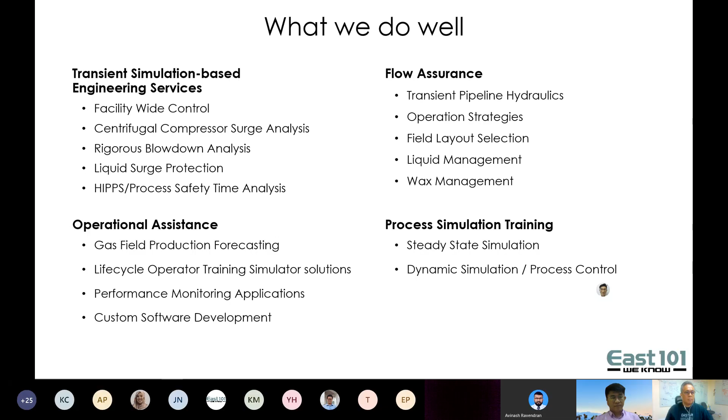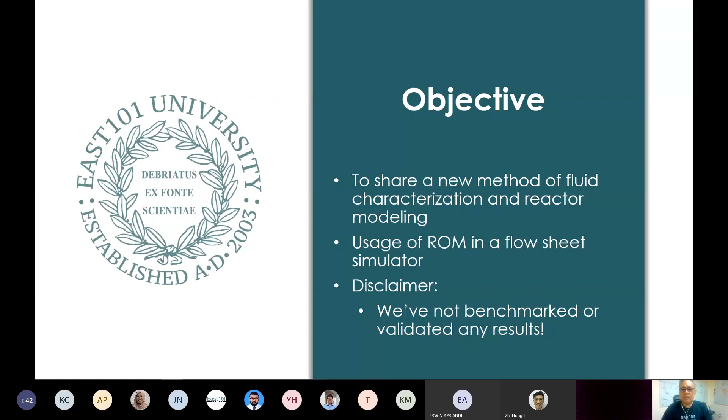Whoops, I've gone back. Okay, so the agenda is as follows. First thing is we'll take a look at fluid property requirements in process and chemical engineering, particularly in oil and gas, and in this particular example, particularly for downstream implementations.

We're going to be looking at some of the traditional methods that have been used for this, and we'll also later go into this, what I refer to as a new method of fluid characterization using a molecular compositional model.

After that, I'll show you how some of the reactors are set up and introduce this concept of a reduced order system. Reduced order system, I guess back in the 90s, if anyone was here doing computing in the 90s...

These were kind of, I guess, referred to as neural net models. And I think HYSYS in the early days, in the 90s, had dabbled with implementing neural net layers to make the reactors move faster. I'm really sorry, I'm getting some noise from my phone, I'm going to turn that off. I didn't realize it was on. Okay.

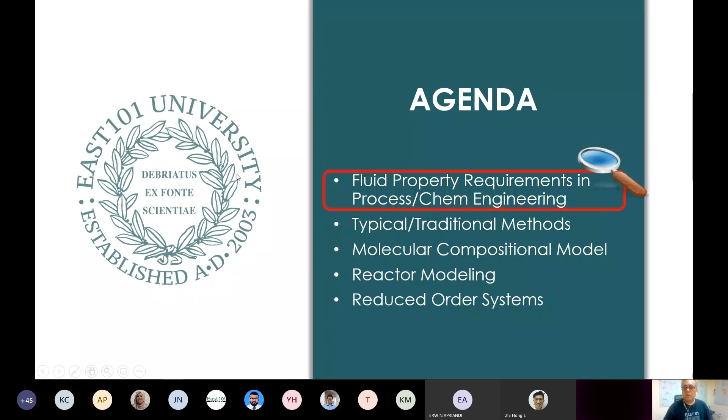So let's take a look at fluid property requirements in process and chemical engineering. Here I'm showing your typical asset life cycle. Some of this I've kind of covered in the 10 commandments of process simulation, which is the first in the set. I'm just going to skim through this really quickly.

If we take a look at the typical asset, and this can be any kind of asset, it could be an offshore facility, a downstream facility, refinery, FPSO, etc. These are some of the typical activities that go on. You start off with a new opportunity, do some feasibility studies, conceptual design. You later move into basic design or FEED, detailed design, construction, commissioning, startup operations.

Once you've been operating for a while, you start taking a look at improvement, extensions, revamps. And in some cases, at some point in time, if you're operating say a topside facility or an FPSO, when you're having a decline, you might be decommissioning your facility. So if you take a look at all of these steps, all of these particular areas, you're going to be doing some form of computation or simulation.

It could either be doing a flowsheet simulator like Symmetry or HYSYS, Unisim, Pro2, Aspen Plus, or it could be a fluid flow application like Olga or PipeNet, PipeSim. There's a range of applications. So I think nowadays you can't get into an engineering office without seeing some kind of modeling or simulation being done.

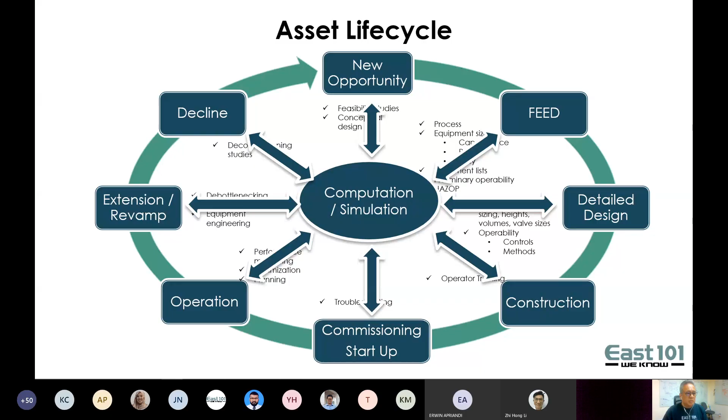Just before I continue, I'm just going to ask my team over here, is everything coming over okay, the video and the voice? Yes, it's perfect. Okay.

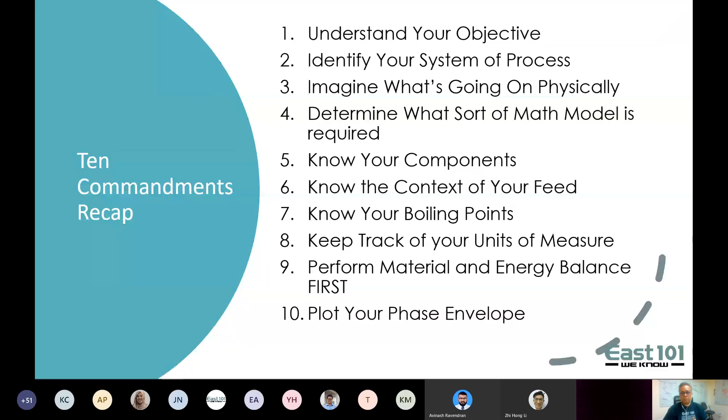The rest are pretty much common sense for most engineers: keep track of units of measure, perform heat and material balances first, and plot your phase envelope. So you notice I've got 3 items here, 5, 6, and 7, which are essentially about the components of the feed. It's really important. Of these 10 items, 30% have to do with understanding your components and your feed, because if you don't have your feed properly characterized, everything else is not going to be correct.

Okay, so let's take a look at your typical hydrocarbon supply chain. I'm starting off from the reservoir. I'm a chemical engineer, and for a chemical engineer, that's what a reservoir looks like to me. So we've got essentially some gas, oil, and water trapped between some impermeable or cap rock.

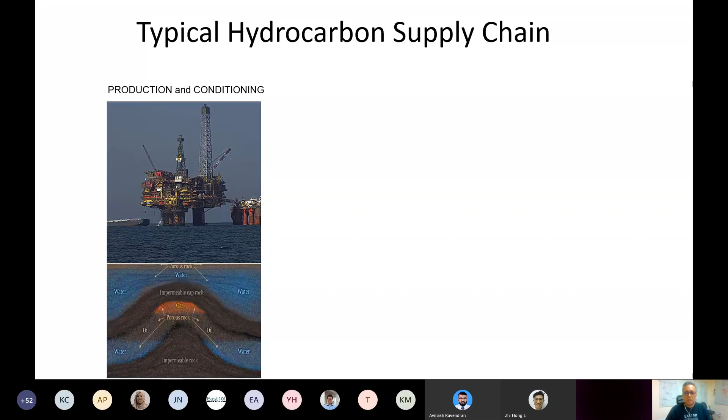You have a drilling and processing platform. Bring up your hydrocarbons and impurities, separate them at the production stage. You have some production conditioning happening in an upstream facility. Then you feed your hydrocarbons to a downstream or midstream facility, a refinery or gas plant, where you do a first step of separation.

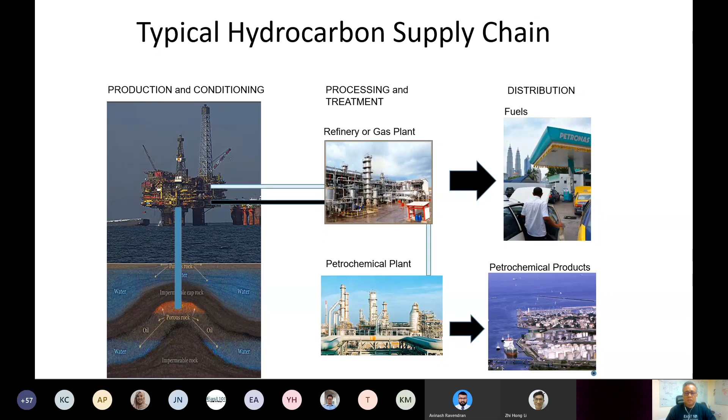From here, you might be distributing fuels. So if you go to Kerteh, you'll see all the hydrocarbons coming from offshore, landing at the onshore gas terminal or the onshore slug catcher, and then being piped to a refinery or gas plant. Then the fuels are sent to distribution or export, middle distillates, or some of the ethylene would be sent to petchem for petrochemical products. So this is a typical supply chain.

And today I'm going to talk about roughly two of these areas: production upstream and some refining.

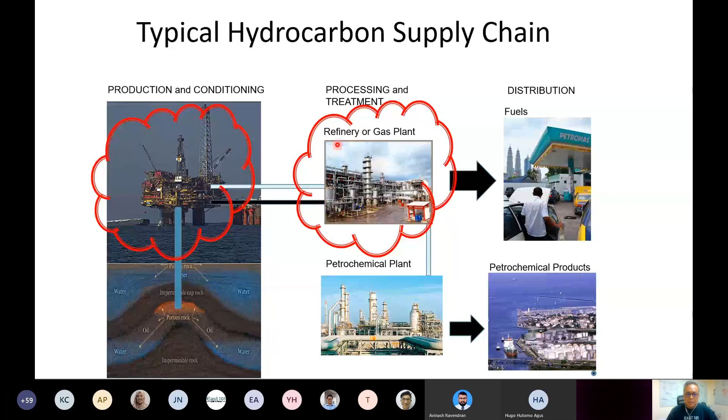So I'll be talking about both of these areas, production and conditioning, and processing and treatment. But primarily we will be focusing on, that's my laser pointer, on refinery today. But I'd like to talk about some of these other areas first.

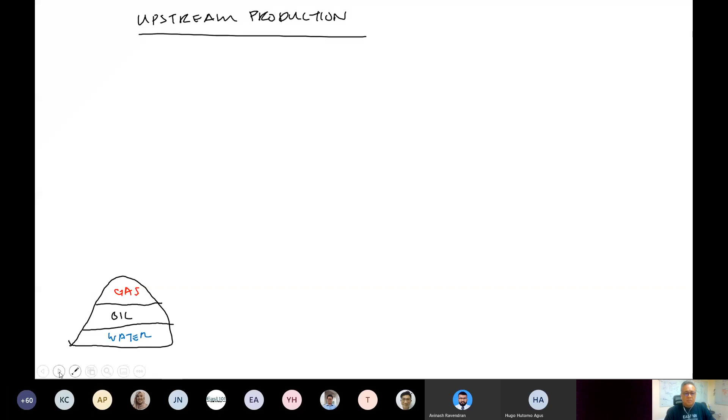Okay, so we're talking about feeds and properties, fluid characterization and various properties. Let's take a look at the typical kinds of properties that we would be interested in. So I've got again a sketch of an upstream facility. I've got my hydrocarbon reserve, a well choke, a pipeline, and I'm bringing this to a topside facility.

And the topside facility, I've got some bulk separation. I'll be sending my gas to compression, gas injection, gas lift export. I'll probably be doing some dehydration with the gas. I might have some TEG dehydration, or in some cases we have CO2 acid gas removal. We might have some membranes, or in some cases some amine systems.

For the oil, we'll generally be dewatering it and potentially stabilizing it in some cases. If it's an FPSO, you'll be stabilizing it and putting it in the storage tanks in the hull. Otherwise, if it's a central processing platform, you might be sending that to an onshore facility. And the water is generally going to get treated as produced water, and it'll be used as water injection or sent overboard, so you'll be removing all the hydrocarbons from there.

So if we take a look at this, what kind of engineering calcs do we do? I think we've got in our audience today people coming in from upstream and downstream. But I guess we've got some common computations that we have across the board.

So if you take a look at an upstream facility, on the pipe we typically are going to have some kind of design computation that we'll be running, diameter, layout. When you do your field selection, you'll be taking a look essentially at the hydraulics in the system. And later you'll be doing some flow assurance, transient fluid flow using an application like Olga, and you'll use this for liquid management, slug control, slugging management, wax management.

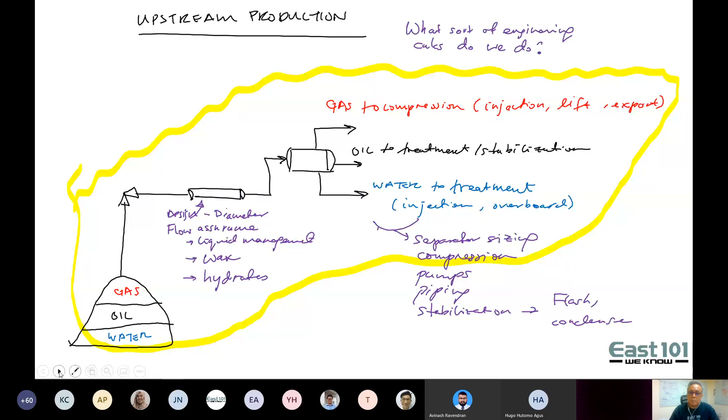So what kind of properties do we need? This is always the first thing you think about when you're starting your simulation. I'm going to divide the properties into groupings. The first is what I'll refer to as thermophysical properties.

Thermophysical properties are generally properties that feed into the thermodynamic functions we use for a lot of our process engineering. We'll get into that in a few slides down the road. But some of the thermophysical properties I'm talking about are density, molecular weight, vapor pressure, PSAT, heat of vaporization, CP, gamma, CP over CV. These are thermophysical properties.

These essentially consist of the bulk of the properties you're using when you do your steady state simulation in your flowsheet simulator, whether it's Symmetry, HYSYS, Unisim, Petrosim, or Pro2. So I'd say about 90% of the properties you're using are going to be thermophysical in nature, for most of your heat and material balance and engineering sizing calculations.

That essentially covers a lot of the facilities. You need that as well for your pipeline, and if we've got any visitors or participants who are reservoir engineers, you'll essentially be looking at this as well when you do your reservoir modeling.

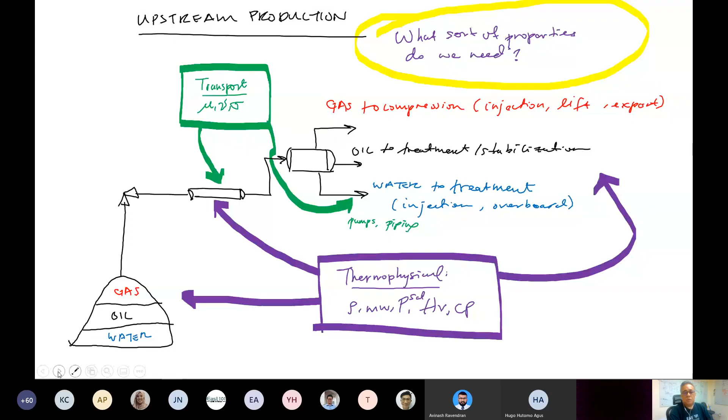The next important part is transport properties. Now these are always a bit tricky. Those of you who've been doing a lot of flowsheet simulation for a while know that gas transport properties are okay, but liquids are always a bit iffy.

Because let's say if you've got oil and water, you might be having emulsions forming, and that changes your overall viscosities a lot. So transport properties, typically we're looking at those when we're looking at pipelines, or when sizing any equipment that needs to move the fluids and liquids, like pumps.

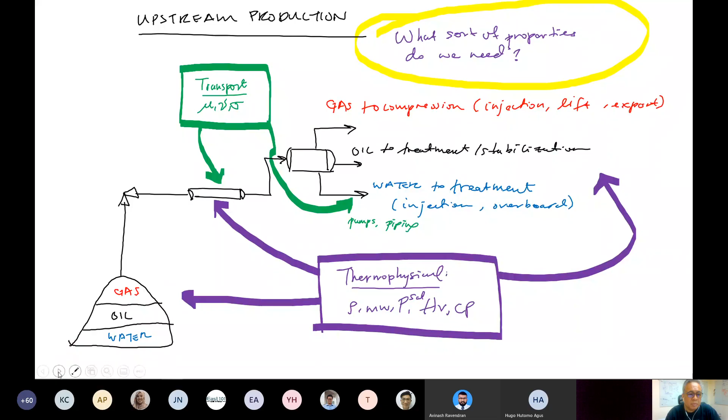The next one, you don't see so much upstream—at least I don't see it too much upstream because I'm doing primarily process and flow assurance. That's chemistry. If you're doing flow assurance, you'll see chemistry creeping in when you're doing wax predictions. If you do a lot of wax predictions, you're generally going to require GC results to C60 or C80 paraffins.

You also have some chemistry requirements when looking at corrosion. So there's some chemistry requirement upstream, and depending on what area you're in, the amount of chemistry you use can vary. For most process engineers and flow assurance engineers, the chemistry for upstream is primarily going to be focused on wax type issues.

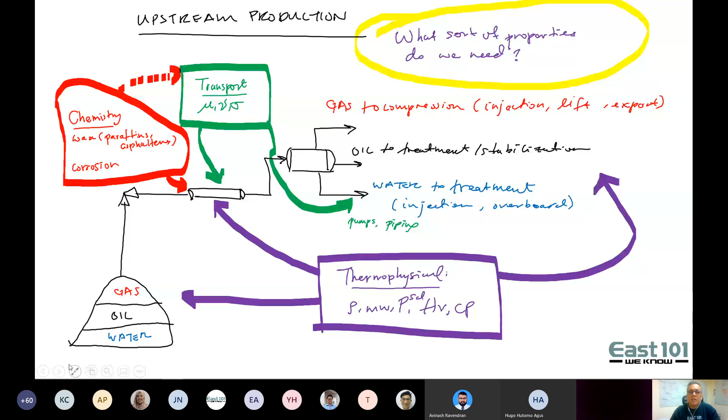So that's upstream. What about downstream processing? Downstream is a bit different. Downstream, I've got fluids which are nice and clean and well behaved, and they're stabilized and sitting in atmospheric tanks. If they're liquids, I might have a gas storage coming from a sphere feeding into my system.

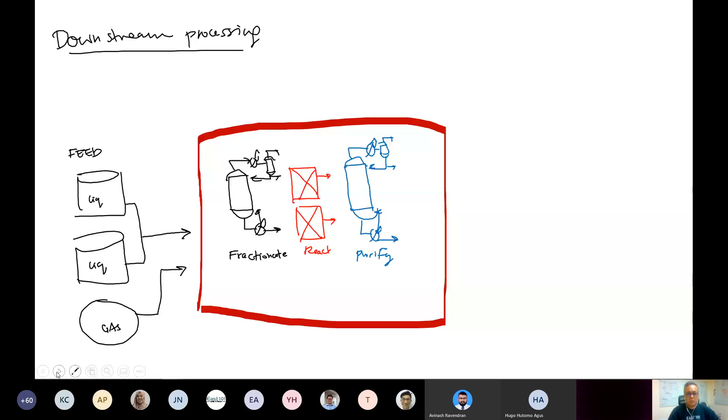If I take a look at my facility, I'm just going to do a very rough sketch for this. Generally I'm going to have some fractionation, probably followed by some treatment, reaction, and purification. In general, you're going to see this in most of your downstream facilities. And then you'll have some nice clean products, which you'll keep in atmospheric tanks, or if it's a gas, in some spheres.

So if we take a look at these processes, we can get by for most of the work we're doing using thermophysical properties for fractionation, compression, rotating equipment, etc. You can get by most of the time with thermophysical properties. When you're looking at more detail in your distillation towers, if you're looking at hydraulics, then you need some transport properties—if you're looking at tray hydraulics.

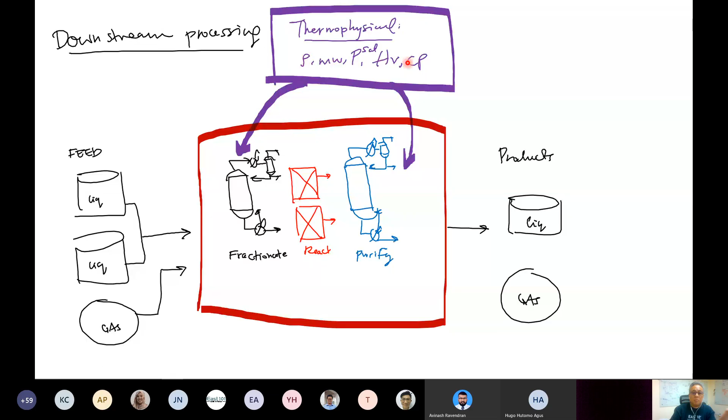But most of the heat and material balances—again, about 90% of the work you're doing for your fractionation blocks—are generally going to require thermophysical properties: density, molecular weight, PSAT, heat of vaporization, and sensible heat, CP.

Now, this is where the chemical engineer comes in. This is why we spend 4 years in chemical engineering school, and why we take about 6 semesters of chemistry. At least I did 2 semesters of general, 2 semesters of organic, and 2 semesters of physical chemistry.

When we're looking at reaction and treatment systems, this is where we need to understand molecular definitions, reaction mechanisms, and stoichiometry. We need to have a handle on specific energies, heats of formation, which we then use to estimate heats of reaction and Gibbs free energy. All of this information depends on understanding the chemical structure.

If you remember from school, we calculate the heat of formation of a compound by summing up the heat of formations of all the individual constituent components. We use that as a basis. These energies are needed to calculate the amount of energy involved in our reaction systems, and they impact the kinetics or mechanisms. It's important to understand molecular structure and glean information from there. Let's bear that in mind - this is for downstream processing. That's my extent of organic chemistry.

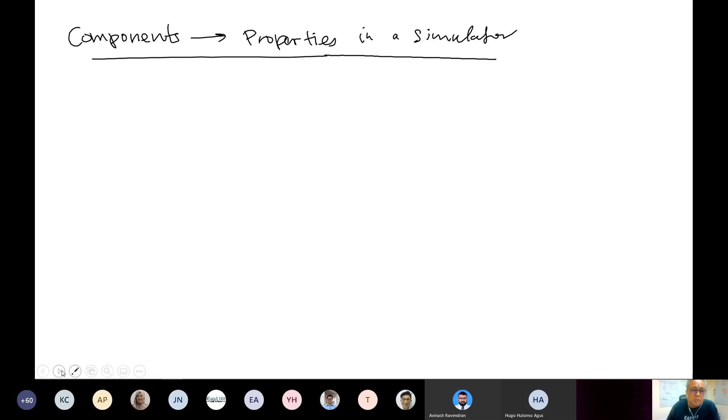If you're using a standard process flow sheeting tool like Symmetry, HYSYS, Unisim, or Petrosim, you'd find a component database with a library of common components: methane, ethane, propane, CO2, amines, the whole kit and caboodle. I can't remember exactly how many components they have in Aspen, HYSYS, or Symmetry - thousands, on the order of 2, 3, 4 thousand components.

These are what we refer to as library components - they're stored in your simulator and come with all the various pure component properties. Base properties like normal boiling point, molecular weight, standard liquid density, and other properties required when we perform thermophysical property calculations: critical properties, acentric factor, dipole moment, heats of formation, Antoine coefficients, viscosities, and transport properties. When you buy a simulation tool, all of this is in the data bank - you don't need to input any of that.

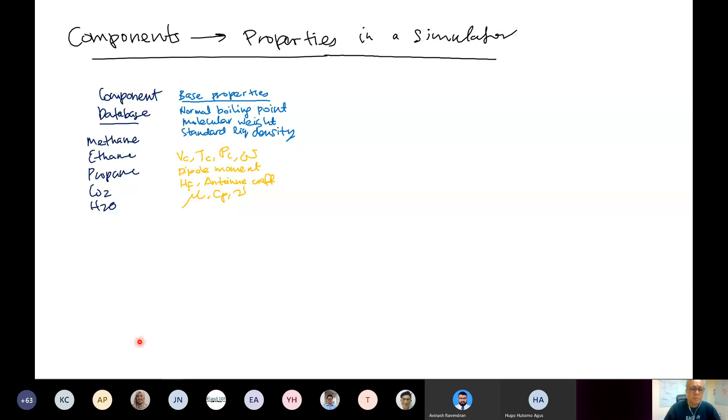There is another class of components that they like to call hypothetical or pseudo components. If you're working upstream, your hypothetical or pseudo components will generally be something like your plus components, C7 plus components. If you're downstream, this will essentially be your assay, either your crude oil assay or your product assay - gasoline, straight run naphtha, etc. These are generally represented in terms of a boiling point curve.

The way pseudo components work - they're not in the system, so you need to input information. If you've got a C7 plus component, you would input some base properties: normal boiling point, liquid density, molecular weight, and then press the estimate button, and magically all of these properties occur. When you're inputting boiling point curves, the same thing happens. You put in the boiling point curve to estimate properties, you might also have a density curve, and this hypo generation tool estimates all of these properties for you.

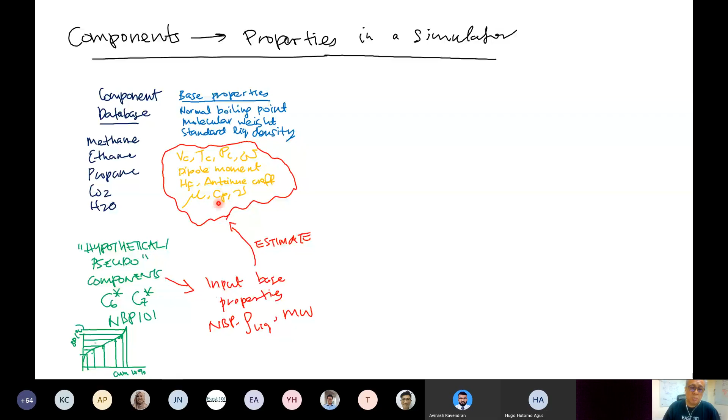Once you have all of these properties in place, for refining or downstream work, you might also input some additional user properties or refinery properties which are important: pour point if you're looking at diesel, cetane index, and PIONA - paraffins, isoparaffins, olefins, naphthenes, and aromatics. Sometimes you can take that information and attach it to your hypothetical components. We'll talk about that a little later.

After you put all this information in, your components are nicely prepared, you create a component package, then you send it to a property package. The typical ones you'll see if you've been brought up on the Symmetry or HYSYS universe, if you're doing upstream oil and gas, typically you see Peng Robinson.

Downstream, you'd probably see Peng Robinson as well. If you're in a petrochemical facility, if you have azeotropes, then you'll have an activity coefficient model like NRTL.

So these property packages, what they do is take all of this information and start generating all the properties that you need to do your engineering calculations. Your fugacities, fugacity coefficients for vapor-liquid equilibrium, activity coefficients, all your thermophysical properties and thermodynamic properties as well - enthalpy, entropy for your rotating equipment, Gibbs free energies for your reactors or even your hydrate formation.

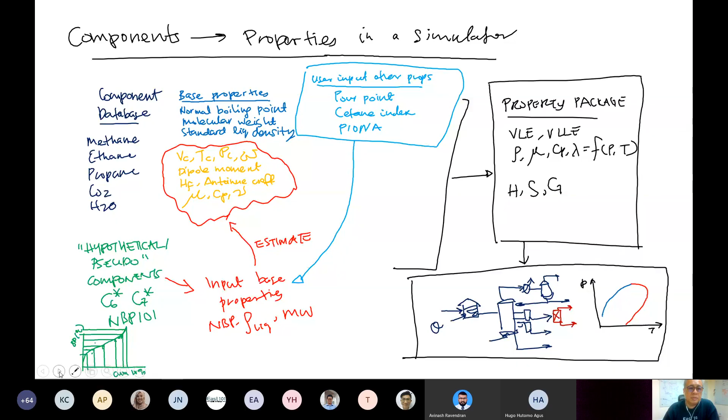So that information ultimately feeds into your process simulator. That's typically how things move, and that's generally how you would essentially set up your model traditionally. So those are the components within your simulator.

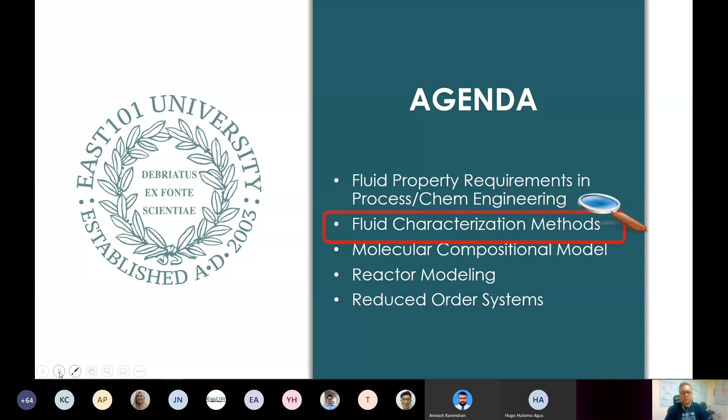Now let's take a look at fluid characterization. Let's take a look at how you typically handle data and how that data fits into your components. So let's take a look at some typical lab analyses for fluid characterization.

For those of you who are upstream, you're going to rely on a lot of chromatography, either GC or high performance liquid chromatography. Based on that, you're going to get molecular definitions or molecular compositions based on standards. What do I mean by that? Well, in your report you'll see methane, ethane, propane, isobutanes, etc. But are you sure that's the components coming through?

Well, that's our best guess. Why? Because we run some standards - standard methane, standard ethane, standard propane - and then we take a look at their retention times. Anything injected that shows that retention time is most likely going to be that molecule. So these molecular definitions are generally based on some form of standard or calibration.

Once you start getting your details - I'm not going to get too deep into fluid characterization here - you might have some heavier plus components. You might take those components and push them through some kind of PVT tuning application, like PVTsim or Multiflash. You'll have a list of components: your C1, C2, C3, C4, and your plus components, C7 plus heavier components. So these heavy plus components will all be generated by your PVT tuning application.

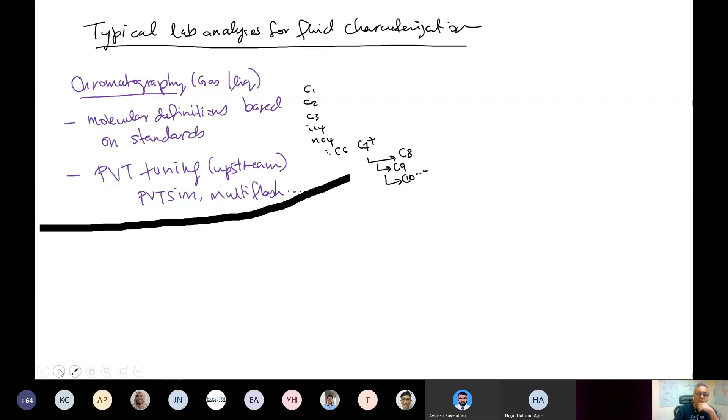Okay, so downstream, if we take a look at some of the lab analyses - a very, very long time ago in the early part of my career, I used to work over at Petronas Research and Scientific Services, before there were two S's. Now it's just PRS. Back then when it was PRSS, they had a TBP lab which ran TBP, D86, D1160 analyses. So we'd be essentially performing boiling point analyses on the fluids.

This is an example of maybe an ASTM D86, which is a single stage distillation. You'd put in your fluid, boil it off, and collect various volumes. Then you'd take measurements of boiling point, noting the temperature when these components came off, and essentially construct a boiling point curve. You'd also take these samples and run them through a refractometer to calculate the refractive index, which would then give you the density - so you'd also get a density curve. Then you'd also run the transport calculations to get the viscosities, surface tensions, etc.

Now, after you've got this information in these boiling point curves, you would then, in the simulator, use the oil characterization tool to generate hypotheticals. If you've been using the common tools, you'll probably notice the naming convention NBP 90, NBP 105, etc. These NBPs are essentially representative of these lumps of components that boil at those temperatures. So you essentially write this curve and cut it at various temperatures, and you get this slate of boiling point components.

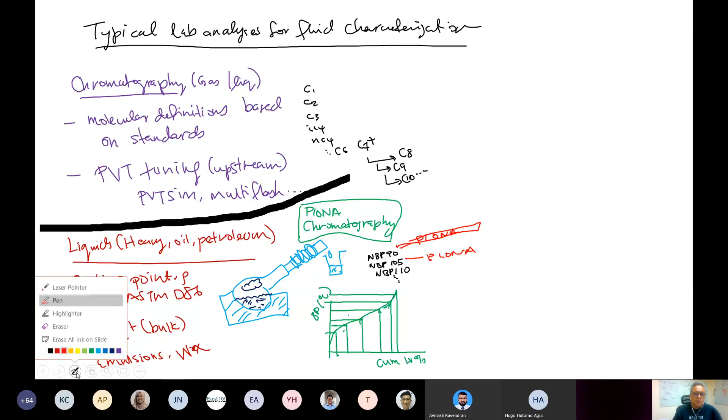That's traditionally how it would be done. So what happens is this kind of results in a fairly limited resolution. We don't really get a lot of chemical structure detail associated with these normal boiling point components, and that becomes a problem later on.

So if we take a look at that, what can I use these components for? Well, these components, as I've shown earlier, they're great for calculating thermophysical properties. We've got enough understanding, enough algorithms to calculate thermophysical properties. There's reasonable resolution on here.

Transport, the gas, it's okay-ish. For liquids, tends to be a bit poor. So when you're a process engineer and you've been sizing stuff, sizing pumps, doing internal calculations, you're going to find that a lot of times you don't really use your liquid viscosities from your simulator, right? You're probably going to use the lab results. So you would use your simulator to get the HMBs, to get the flow rates, and then you get your lab data to get these bulk transport properties for all the various phases, to use that for your sizing.

Yeah, that's traditionally what we would do. Sometimes if you're lucky, you might be able to input like a viscosity curve or something traditionally, and that's one way of doing it. But again, when you're taking a look at emulsions, it's quite difficult to predict because it's actually fluid mechanics.

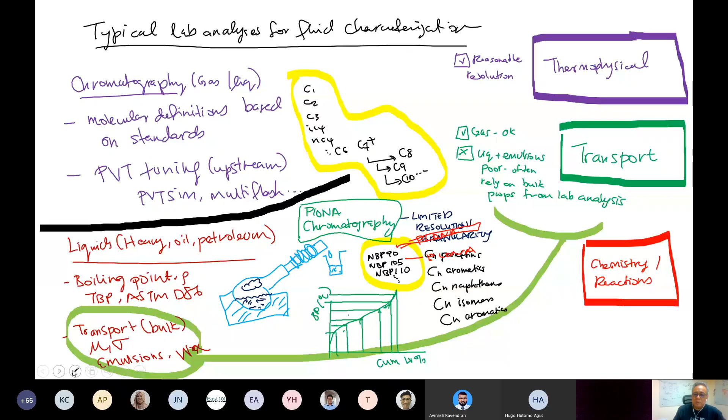Chemistry and reactions - from here, I kind of have a fairly low resolution on that. So light ends, it's okay. I can see my molecules over here. So if I'm doing like an ethylene cracker or something, I'm okay-ish. If I have like a steam reformer, I can kind of get by on that. But if I want to try and use this information for a naphtha reformer or hydrotreater, it gets very challenging.

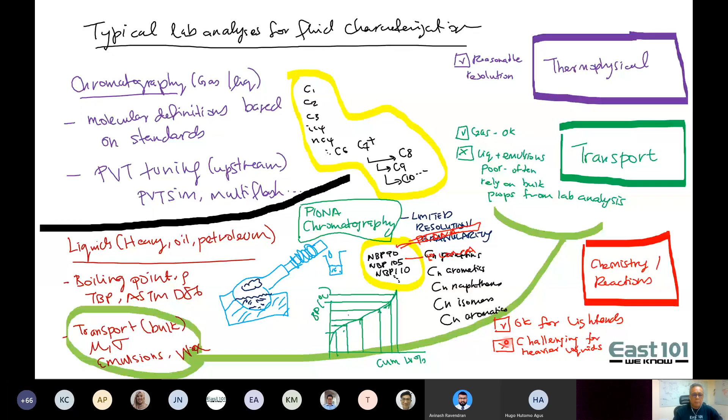So I'm just going to make one slide and talk about PVT for upstream, and that's pretty much all I'm going to be discussing on PVT for now. From now on, we'll be talking primarily about downstream. But I'm just going to make one statement for PVT, for upstream applications.

For most upstream process or flow assurance applications, generally your PVT tuning is going to provide decent property representation. So whether you're using PVTsim or Multiflash, using chromatography, bulk lab analysis, and these tools, you can get enough resolution to do most of your work. So the kind of fluid characterization that I'll be talking about today, using these molecular definitions, PIONA slate definitions, you can use them upstream.

They do give you some benefit, but this is my opinion - I think PVTsim, Multiflash seems to be the go-to application for most of the practitioners in this area. So that's all I'm going to say about upstream.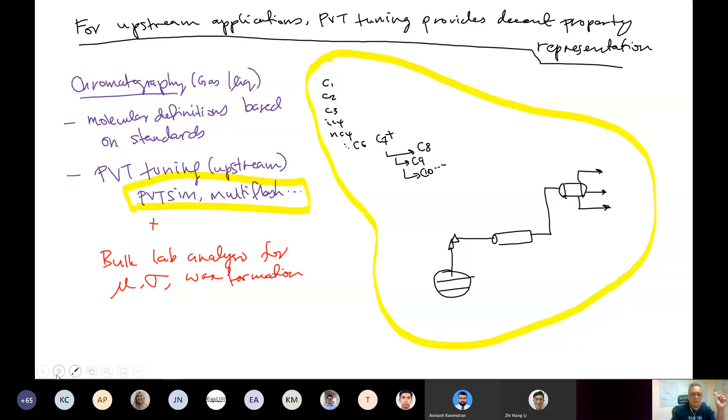So downstream, we've got some issue over here. As I've mentioned, we have limited resolution with the normal way of doing things, with the true boiling point, with the boiling point curves, and associating, lumping in PIONA characteristics with each of these individuals. So it's okay for light ends, but it's challenging for heavier liquids, heavier components.

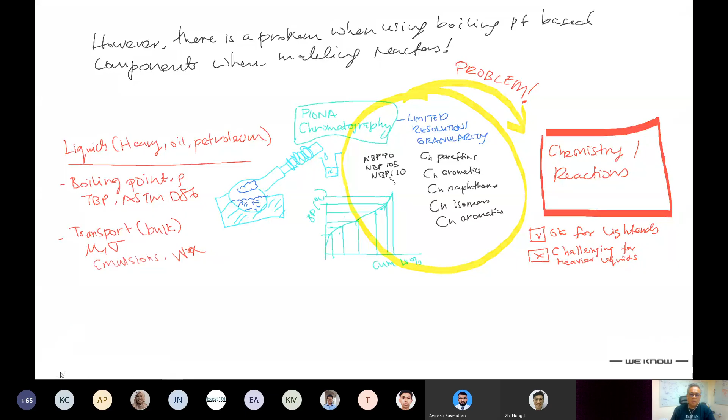So let's just take a look at your typical refinery now. I'm not going to get into refinery modeling, that's probably worthy of a different discussion. Because today I'm just going to be talking about a different way of fluid characterization, which allows us to represent reactions in a more efficient manner.

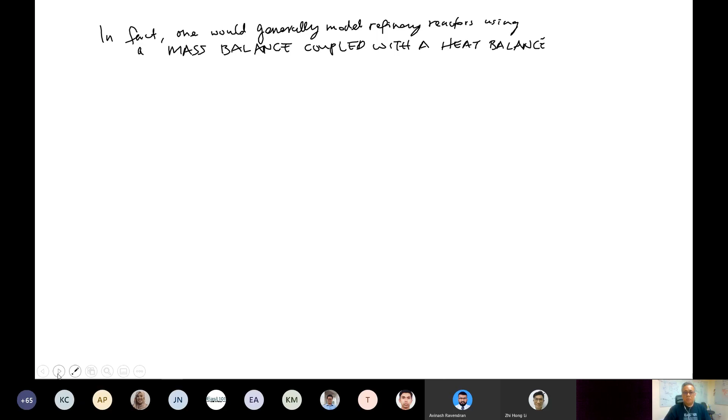In fact, most of the time we don't know - traditionally, when I was just starting my career, we didn't really have many tools to model refinery reactors. So what we did was we primarily modeled that as a black box with a mass balance and a heat balance.

So the way we do it is we would create - let's say if I wanted to model a reformer, like a naphtha reformer, I'd be taking light straight run naphtha. I might get like a D86 characterization for that, and then I create my component slate, and I'd assign that to a stream in my simulator.

I take the reformate, I go to the lab guys and say, please give me the D86 for the reformate, and I would again create a new slate. So I've got two slates of molecules here, a green slate and a purple slate. They're both different. One is my product, one's my feed, another one's my product.

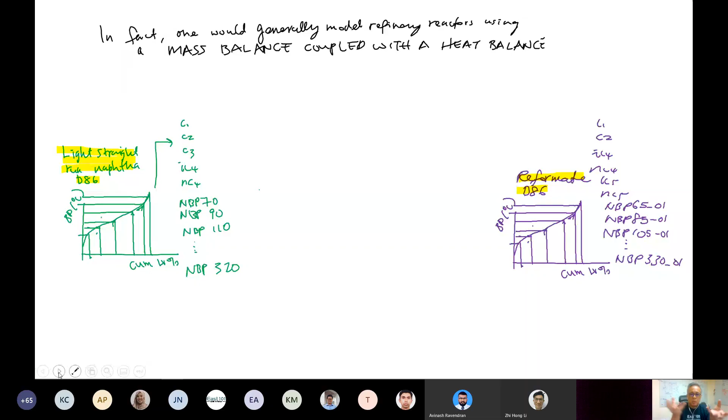If you're using any of these tools, I refer to them as the Craig Morris family of tools. That would be HYSIM, HYSYS, Symmetry, UniSim, and Petro-SIM. They work on a similar computational framework. You'd find something called a balance, so it'd be a mass balance and there'd be an energy balance.

The way we would do this, we'd just input this feed and put in the products. So there's no reactor model. It's primarily for HMB, heat material balance generation. It's not predictive — you can't predict yields, but you can use it to do all of your heat exchanger analysis, a bit of troubleshooting around all the other equipment except for the reactor, because you won't be getting yields.

Which is fine, because most of the time when you're in the refinery — when I did my stint over at Kertih Refinery as a young engineer — most of the time you're not really going to be modeling the reactor as it is. Most of the time, if there's anything wrong, you just call up the vendor, IFP or Axens, and then you yell at them.

These days, though, we want to get more visibility on these reactions. So it's not an option to just look at this and call up the vendor whenever there's a problem. Most process engineers want to have some visibility on the reactors. So this mass balance methodology is okay — I think you can get quite a bit of the job done.

But sometimes, as a process engineer working in the field, you want to know how long you're going to be able to run your catalyst before you start looking at the activity — you start seeing reduction in the activity. So you want to be able to have some kind of a model for that, and you can't do that with this.

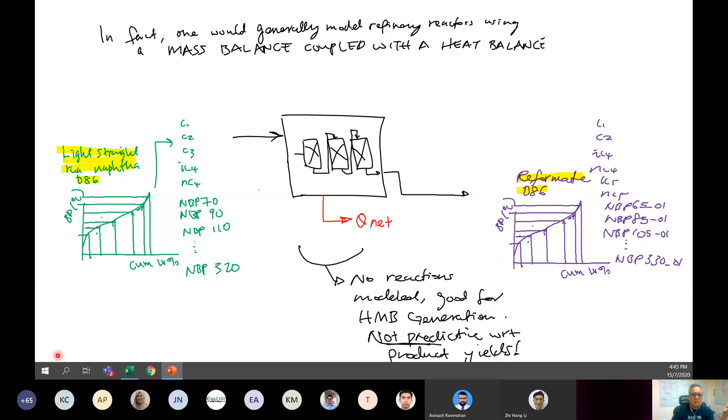I'm not sure when all this came out. Back in, I guess, the late 80s or 90s, some software tools started coming out. I think the earliest one that I saw was from a company called KBC, who are now owned by Yokogawa, and they came up with this sort of lumped kinetic model.

You would essentially have your straight run naphtha, and you'd generate some normal boiling point components. So everything in green here would be, imagine this to be your flow sheet. These are your flow sheet streams, and you have these component slates, one set of component slates.

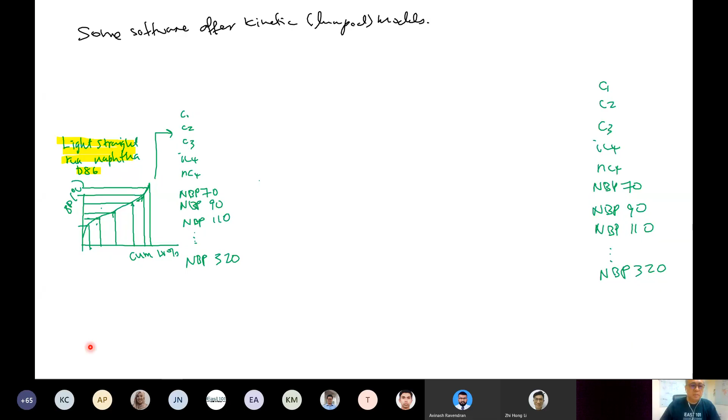And they would essentially provide reactor models, and these reactor models would actually have some form of molecular definition, or lumped molecular definition. So it won't actually be individual molecules, but you can say like C5 paraffins. If it's an isomerization, they might go to C3 and C2s, or if it's C7 paraffins, straight chain paraffins, it might go to like a C5 isomer.

So you've got all of these reactions, and I'm still really bad at organic chemistry. So whenever I have an organic chemistry question, I've got a couple of go-to chemists that I typically bug to help me with some kinetics or mechanisms.

So actually, let me go back. Notice this — I've got like a set of hypothetical components, which I've talked about earlier. I've used this assay generator, and I've got these placeholders, these component slates, some library components. Some of these are normal boiling point components. But in the reactor, I have all of these sort of molecular definitions.

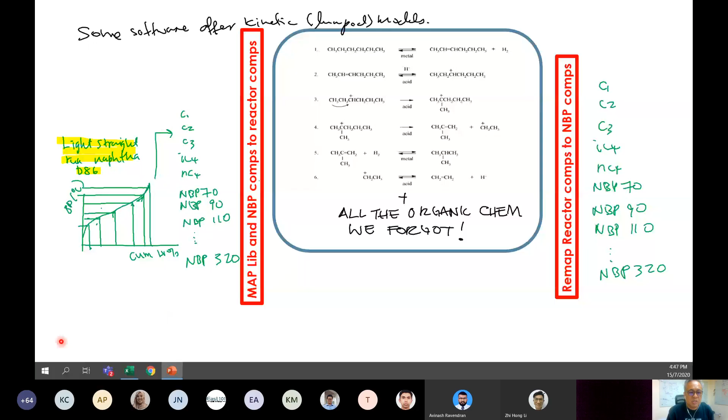You find what happens at the boundary of these reactors, you have to have some form of a mapping. We generally refer to that as molecular decomposition. So if you want to get fancy, you can call it molecular decomposition — meaning I've got this lump, this NBP70. This NBP70 has to map to a range of components.

So NBP70 might be a lump of maybe C4, C5, C6. And somehow over here at the boundaries, I need to then map them to individual molecules. After the reaction's done, I've got to remap them out again to the flow sheet. I think if you've been using tools like Petrosim, HYSYS refining, some of the Aspen refining tools, you're generally going to find this is how we do it.

If we've got anyone from Rapid over here from Pengerang, this is generally how your models work. These two red bars here, they're red for a reason because they're a pain to set up and a pain to do the mapping. So sometimes there's a bit of automation, sometimes we have to do some hand mapping to map the boiling point components to the molecular definitions. And you can imagine you have a headache if you have a recycle, so you have this stuff coming back in again. That can be rather challenging computationally.

So this is how some of the traditional tools, I guess the more modern tools—by modern, I mean everything 1990s.

To me, that's modern because I went to school in the 80s. So yeah, and that goes for my music as well. I think any records issued after 1990 for me are still new music.

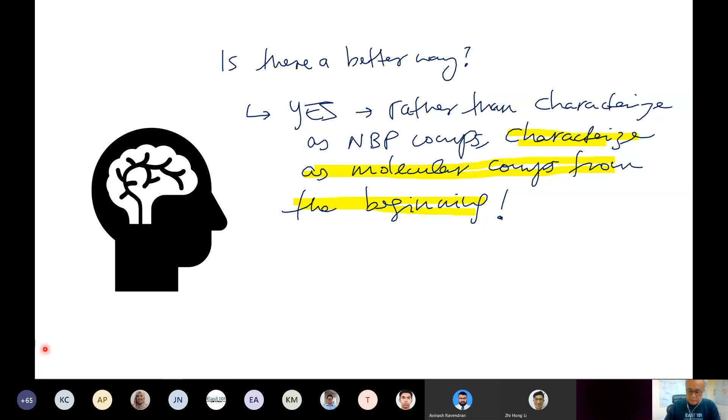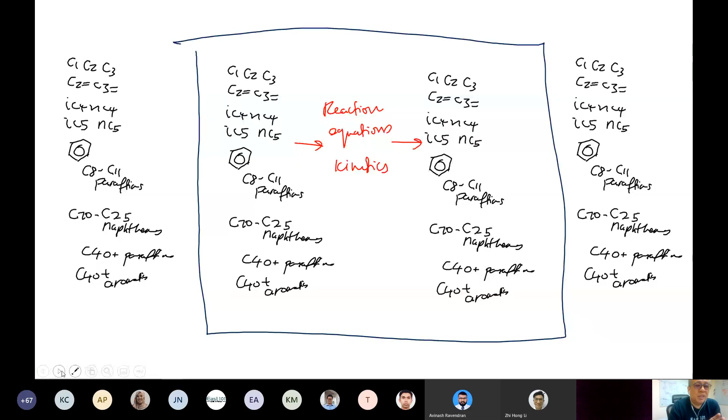Notice one thing though: when you look at these kinds of representation, you've got a heck of a lot more components than you do when you're doing your TBP characterization. So if any of you have done crude characterization, like a crude tower or some of the reaction modules, you might have a slate of maybe 20, 30, 40, 60 components. But when you go down to here, you have a lot more—I'll show you how many components get generated. It's a whole bucket load of them.

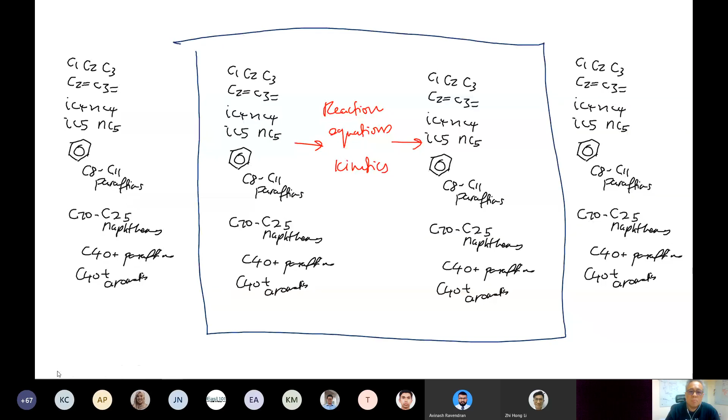Why didn't some software companies do this in the past? It doesn't sound like rocket science, right? Well, I'm not a developer, so I can say things like that.

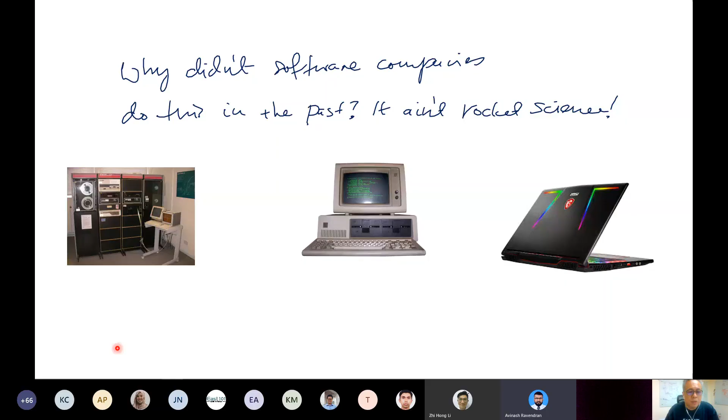So what we didn't have in the past—well, now we have cheap and fast computers with a lot of cheap memory, because we need to have a lot of components. And if you want that many components, you're going to need a lot of memory. If any of you have done simulations, particularly dynamic simulations, the more components you specify, the slower your simulation runs.

Okay, so now I'm going to talk a bit about the molecular composition model.

You might hear this referred to as your molecular composition model, or the molecular decomposition, or PIONA slate, or PIONA molecular slate. It's all a similar concept. I just like to stress that I'm not going to get very deep into this, so this is just a bit of a sharing.

I recommend that if you're doing refining work, and if you're working with reactors, this is probably something worth looking at. This is actually when the company came up with this. Right now the software is owned by Schlumberger. Prior to that, it was owned by a small Calgary-based company called the Virtual Materials Group, VMG, who were former colleagues of mine. When they came up with this, I thought, hey, that's really neat, that's a really interesting way to represent fluids, and I got interested in it.

We started experimenting with it a bit. Again, we've not done any benchmarking. I see there are some of you guys from Refinery, and presumably some ladies and gentlemen from Pertamina. You guys have a lot of data. Also, I don't know if we have anyone from Pengerang, but you guys have a whole load of data, which would be great for benchmarking these kinds of cases.

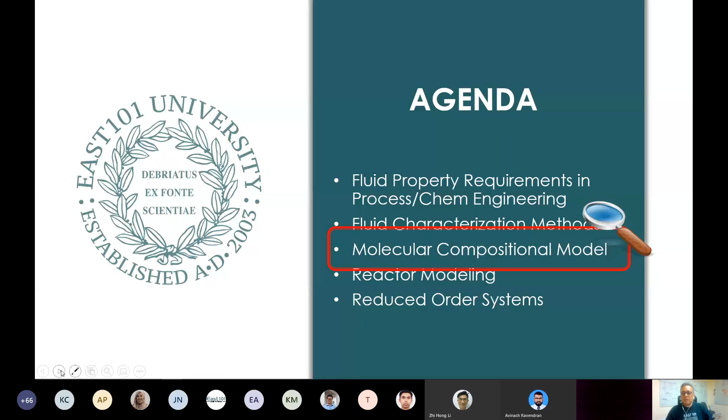So let's take a look at this molecular compositional model and see what it's all about.

If we take a look at this, this is a screenshot from Symmetry. You might hear it referred to as VMG Sim or iCON, but this is pretty much the layout. So what I have here is an RFCC model. I'm getting feed, in this particular case, from vacuum gas oil and vacuum residue. I'm blending it here and putting it into the FCC unit. We'll go into that a bit later.

And then the reactor products are essentially being sent to a column. In this particular example, we're using a simplified column, so it's not a tray-by-tray column. In this case, just to facilitate some computations, we're using, I guess there's different ways of referring to these, sectional columns or K-based columns, but they're not tray-by-tray, they're sectional, probably sectional K values.

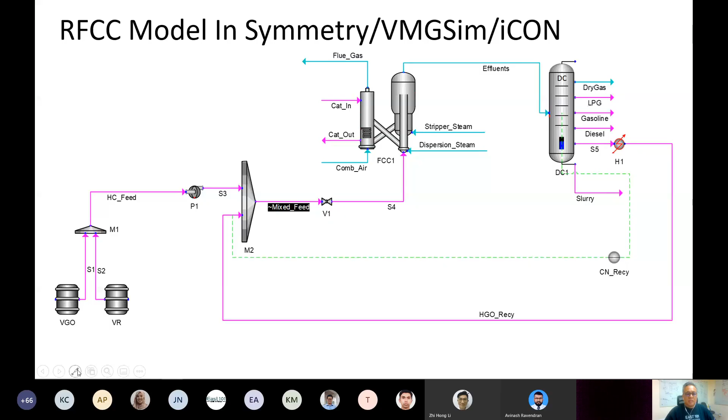So in this case, let's take a look at these two feeds, vacuum gas oil and vacuum residue. If we take a look at this analysis, what we would typically do is input, take a look at what kind of data we have. In this case, we have some distillation data, which would generally be a vacuum distillation, so D1160, a single stage apparatus, and we'd be generating the D1160 curves.

Now, after we generate this, with this tool, something interesting happens. Once we've generated this, we're at this point in time still in the fluid package, still in the basis environment. At this stage, there is what I refer to again as a molecular decomposition algorithm.

So what we do is we take a look at these cut points, we take a look at the boiling point curve, and we actually compare it to some target values: bulk PIONA, bulk specific gravity, bulk SARA, bulk pour points, etc. And then based on that input, it will generate a slate of components, molecular-based components.

Notice these are not actual pure components. You have some pure components up here, C1, C2, C3. At the top, it's a badly drawn benzene ring. You've got some of these other components. So these are still kind of lumped a bit, but there's a bit more chemistry and a bit more resolution around there. These components have chemistry definitions on them, they've got heats of formation, free energies, etc.

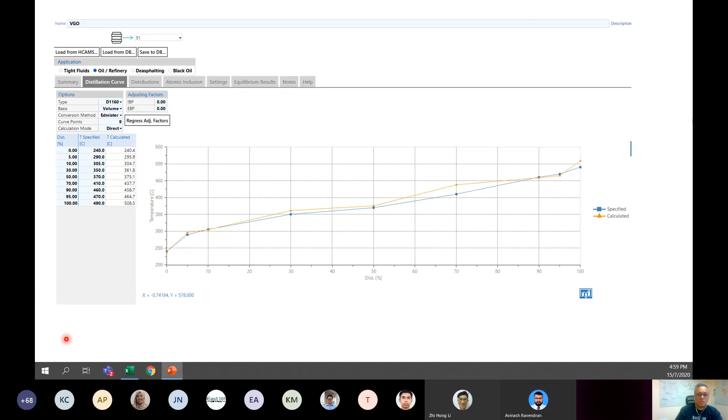So you put in your D86 curve, your D1160 curve, and then you would essentially define the parameters to allow the molecular decomposition to occur. Let me just zoom in with the magnifying glass. So let's take a look at some of this.

So these are bulk properties. This will be the bulk on that VGO and VR sample. 31 mass percent paraffins, isomers. So these are the bulk properties. These are the sulfur content.

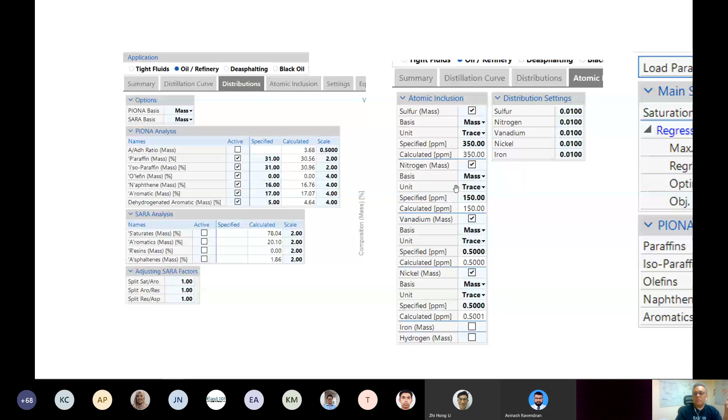And then what happens is there's then a regression. So what happens is from the TBP curve, from D86, from D1160, you go to TBP. From the TBP curve, it feeds into this molecular decomposition tool where you have all of these parameters. And then you use this regression.

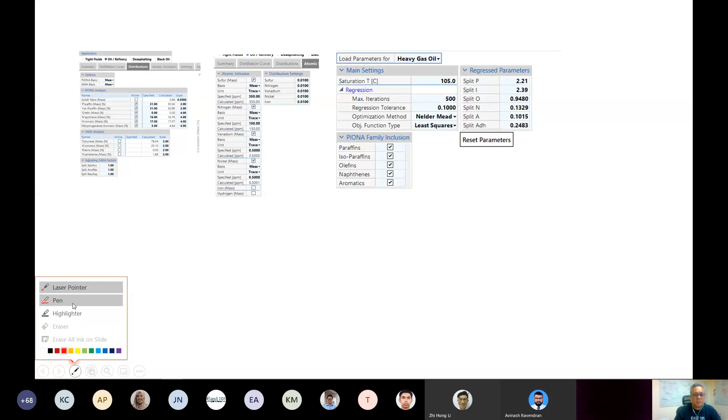It's a regression decomposition tool. And what happens is it then generates - let me put this back to pointer because I need to - okay, I'm sorry, I'm going to turn this up. Okay, so after you've seen all that information go in, it then generates all these components.

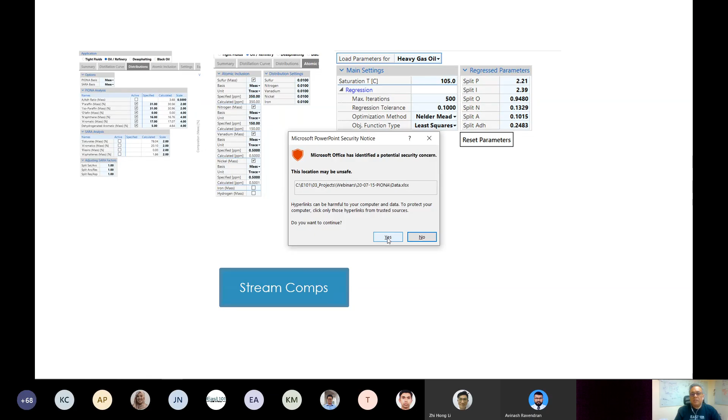So from the TBP analysis and from PIONA, let me just go all the way up to the top. This is just an example of all the components that get generated. So as you can see, it's a lot more components than you would have if you were doing a typical TBP analysis. You can see again here by carbon number and homologous family, C11 to C14 paraffins. You can actually set the resolution of this to see how fine you want to have these cuts.

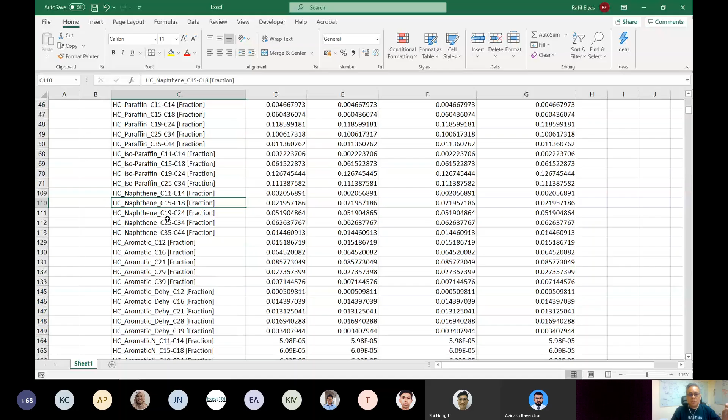So now all these molecules have chemistry associated, and you can use them for your reaction sets. Yeah, aromatics, isoparaffins, naphthenes. So you have a much richer composition. So that's in a nutshell what this molecular decomposition tool does.

So you can get from TBP analysis, from boiling point curve analysis, you can decouple all of those NBP components into these individual molecular definitions.

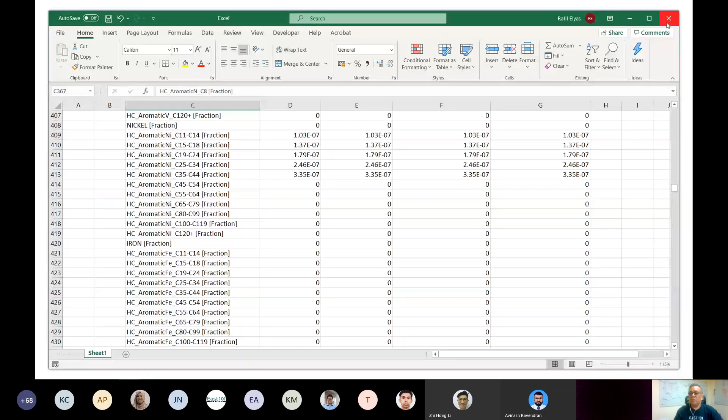I find that sometimes when I'm talking about this - when I first saw it, I was really excited, and the other people who were really excited were my former colleagues who work a lot in this. But I think most other engineers said, 'Oh yeah, isn't that how we did it before? Doesn't it do the same thing?' No, it's slightly different. It's a different way of defining your fluid.

So now we have a lot more detail on the individual components, which can be used for reactions. So now that I've got all of these components, I can send them into a reactor model, and my reactor model can have all the kinetic relationships.

I think if you go to - I think we've got some people here from academics. I know that I've still got some buddies in academics who are doing research in refining, and I still see a lot of work done on this sort of molecular decomposition and lumped kinetic models. And at the end of the day, I think a lot of that research goes into these kinds of models.

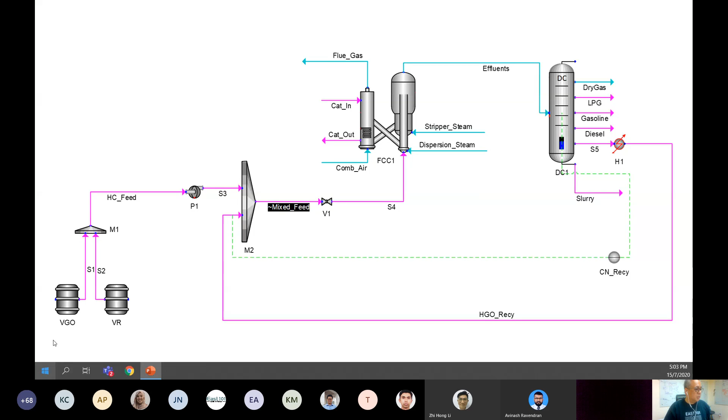So I'm just going to switch over to the software, to the VMG, the Symmetry software, and just show you what this looks like. Okay, so this is the tool.

Their interface is a bit different from most of the tools that you've been seeing because it's based on Visio. So you need to actually acquire Visio and then use this as essentially the GUI. So it's very similar to most of the flowsheet simulators that you're using.

So these are the feed characterization drums that we have. As you noticed, I showed you a range of all of the components. There's some smarts over here, so you can tell it if you're doing some work for refining or black oil. There's also an upstream module for this, and you can put in your bulk experimental values here, overall density, and then later the routine will generate the components to match this overall density.

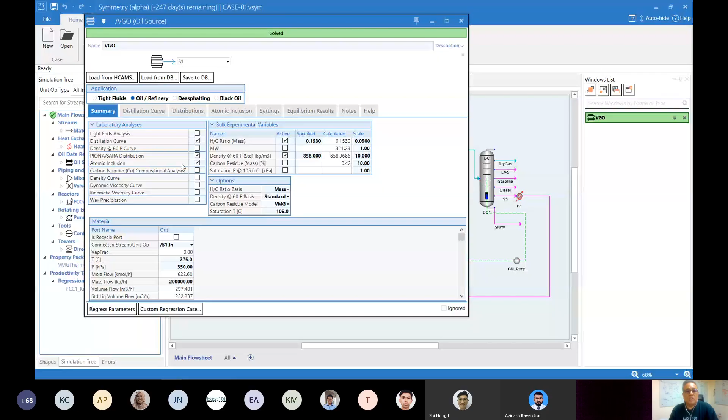So it kind of works, if you want to think about it, similar in theory to C7+. You put in the C7+ component and then specify some GORs or dew points, saturation points, and then tell roughly how many molecules you want to split it into, or there's some intelligence that splits it up into some N molecules, N plus components. It's a similar concept, but things are more sophisticated here because you have things like PIONA, SARA definitions, and all the various PIONA definitions over here.

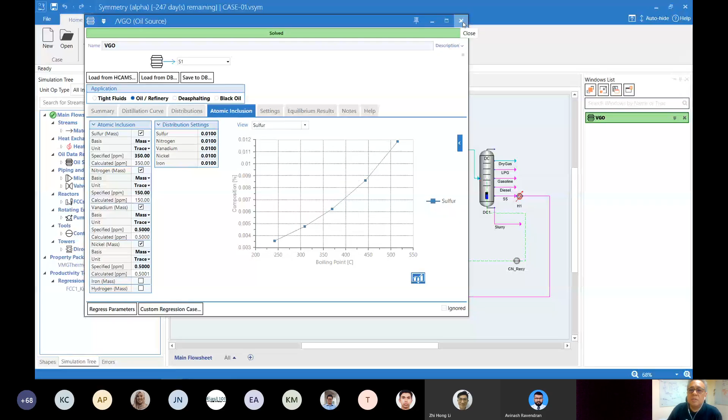They also allow you to include some metals, and this is really important because ultimately these fluids are going to go into your reactors. So you want to have a handle on how these metals are propagating across your flow sheet. That's all I'm going to say about this for the reactors. If you want to look at this in more detail, you can contact your friendly Schlumberger sales engineer, and I'm sure they can arrange for something more detailed to look at.

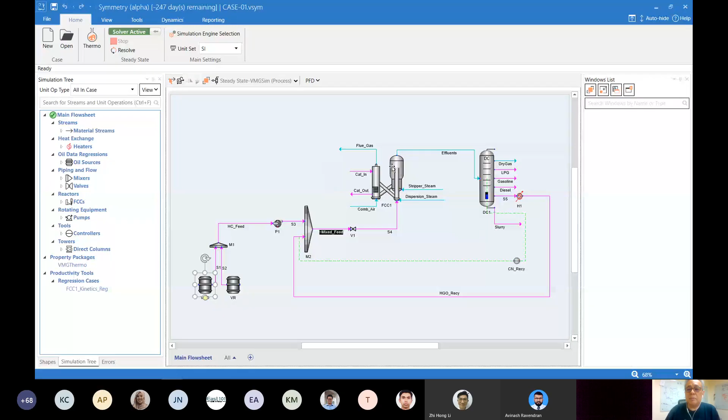So let's have a look at the reactor. I'm not sure how many people here have done reactions. Maybe about 10, 15 years ago, when I was doing a lot of work in refining, we used black box models. But now, as you can see, these are fairly sophisticated models that we have here.

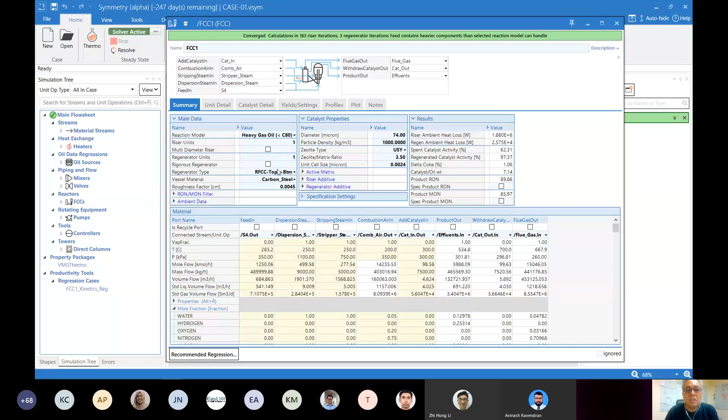So this is for an FCC unit. You can have the riser in your details, or your riser characteristics. You can have your stripping section over here. You can essentially define the regen as well. So these are all characteristics.

I'm not going to go into this because this is worthy of like a training class on its own. If there's anyone from Pertamina or Schlumberger Jakarta, I think I ran this class sometime last year when we were free to travel all around the planet wherever we wanted to go.

Now we're doing a lot of these. That's why we have to use these teams now. But I think I was in Jakarta sometime last year, so I think there are some ladies and gentlemen from Pertamina and ITB in that class.

You can specify your CAT as well, so your zeolite type. You've got all the various options over here for that. And yield targets that you want to specify.

So you'd run your reactor. I'm not going to run that right now because I run my company, so I have a management computer. I don't have like a nice Alienware or MSI machine, so I wouldn't be doing the software justice by running it off my management machine.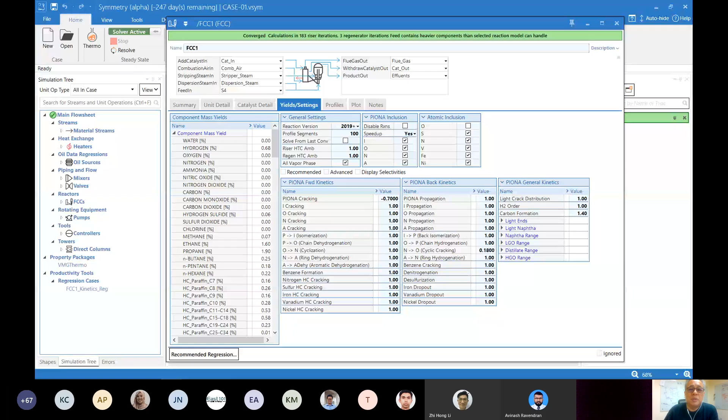So this is okay for doing like a run on my own. But I think if you want to have like a proper run, you probably need to use a proper engineering machine for this. So this is how the reactor works.

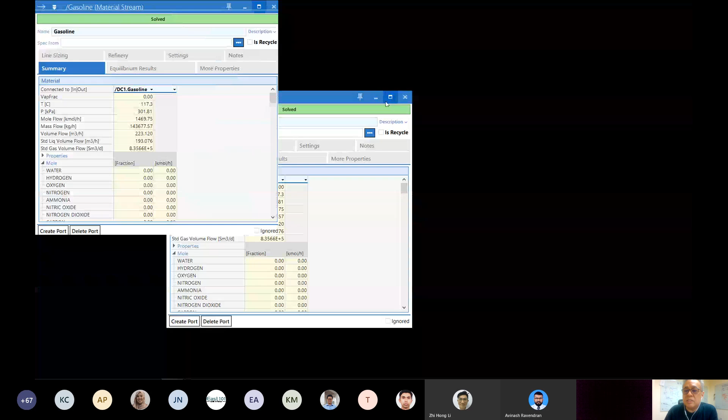If I take a look at, say for example, the products over here, let's go to some of the, say, gasoline, for example. So this is pretty neat. I've got all my components, and you can see I've got a bucket load of components over here, and they're kind of distributed. In my feed, my components are more spread out. Over here, I've got more grouping around this gasoline, around these middle distillate and aromatic sections.

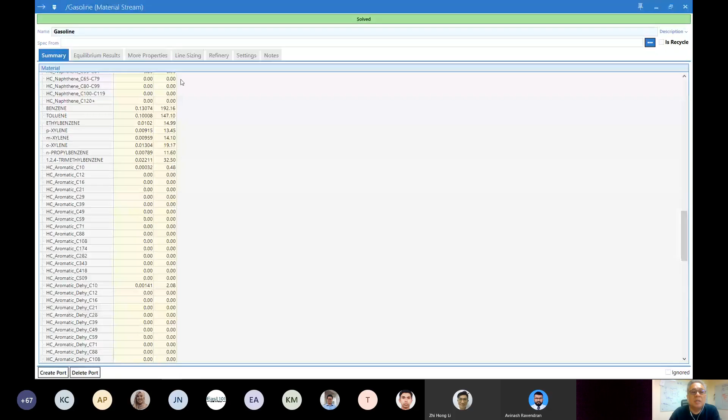If we can look at properties, this is pretty neat as well. I can see the hydrocarbon properties, and these actually work. I can see essentially how my metals, if any, are distributed, how sulfur is distributed. I can see my vapor pressure, RVP, etc., various components and PIONA details.

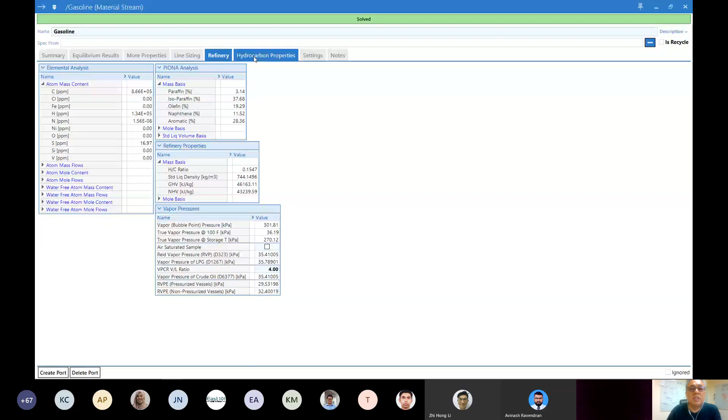I can take a look at some of my refinery properties, some of the fuel properties, my RON, MON, cetane, methane number. So there's a whole lot of exploring that you can do around here. The neat thing over here is because you've got all of these properties set up, you can do blending pretty nicely. So they work pretty well.

Once you've got a good representation of these components, so you've got your reaction, your fractionation, and later when you're doing like your gasoline blending, you can. I think they've got some blending tools that they have in the tool palette over here. So that's pretty much the reactor setup.

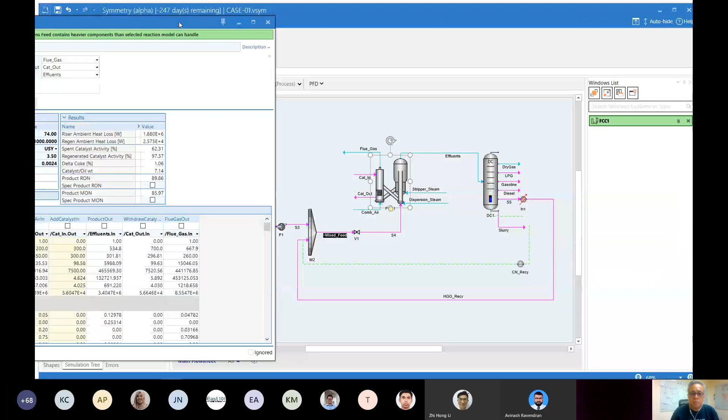Now, one thing about reactors, as you can see, I put a lot of detail. They've put in a lot of detail over here, and they've got, I don't know, maybe about anywhere in the order of magnitude about 100 reactions, 100 or so kinetic reactions, and you're solving that simultaneously. And then you've got flash calculations. So you've got all of these computations going on. So it's not, it takes time.

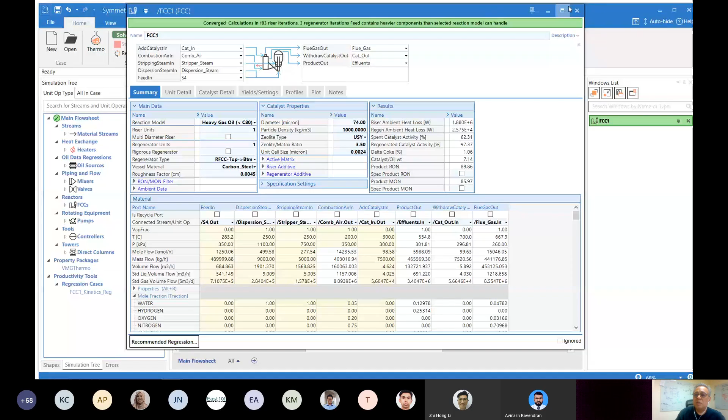If you wanted to use this tool for running quick case studies or for doing like maybe LP vector generation, sometimes using the rigorous engine, the rigorous calculation here might be too time consuming. So they've done something really neat, and I think at this point in time, they're probably one of the few software environments that have done this. I mentioned back in the 90s, Hyprotech had done this with HYSYS. In the old version of HYSYS, there was like a neural net tool if you were using HYSYS in the late 90s.

But I haven't seen it. We called it neural nets. Nowadays you refer to them as ROM, reduced order models. It got me really confused for a while because for me ROM was rigorous online modeling.

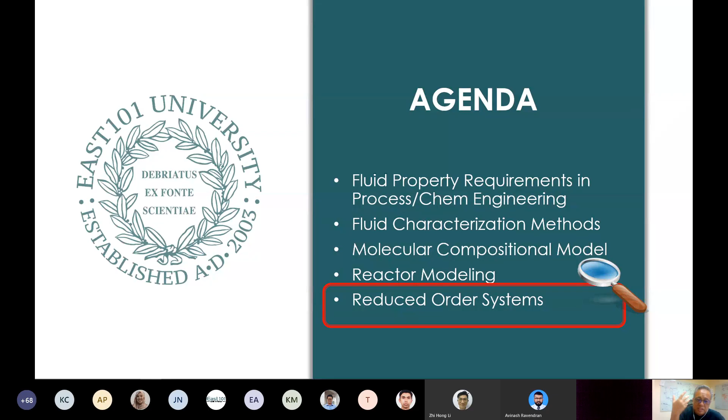So in this case we're calling it ROS, reduced order systems. Instead of having the actual reactor model, with this reduced order model, you can see in this particular module I've got a reduced order model. You activate that checkbox, and you can actually run it.

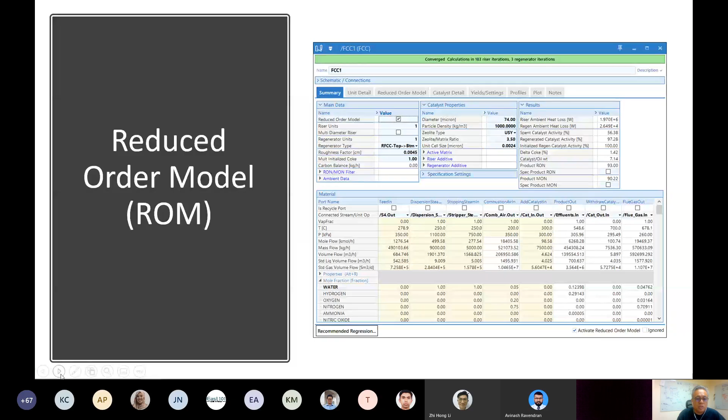What it does is essentially replace this rigorous model with something that looks kind of like a neural net. Now, apologies to the Schlumberger guys, I have no idea if this is what's going on under the hood. I spoke to James a couple of times, and I'm kind of guessing this is what's happening, because there's only a few ways you can skin a neural net cat.

So you would have various inputs that you can specify, and you can train it kind of like using a case study tool. And then you have outputs. One could be, for example, severity of operation, and another one could be the RVP of your product. So there's more cracking, more lighter ends, and then you have higher RVP for certain products.

So this tool, once you've trained this model, the training might take anywhere between tens of minutes or hours. But once you've gotten it trained, it takes a matter of seconds to run. As far as I know, I think Symmetry is the only tool to have this. I may be wrong, but I haven't seen it in any of the other tools we've been using.

So that's a disclaimer - I'm guessing it looks like this. The Schlumberger team, you can ask James or Lante if this is true or if I just told a lie, but I think it looks like something like this.

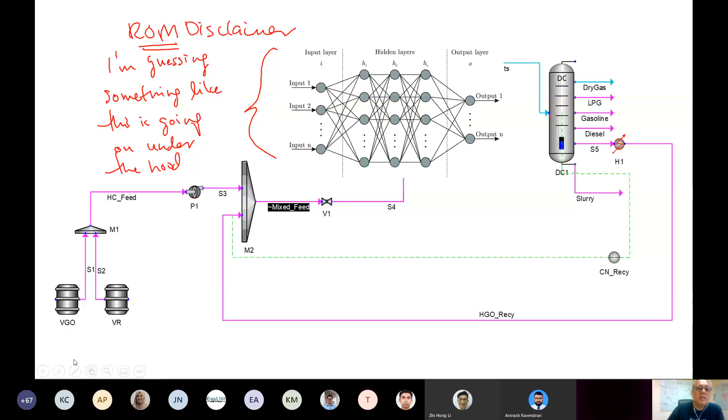Okay, so that's all I have to say for this presentation. Just to reiterate what I was trying to convey, it was just sharing a new method of fluid characterization and reactor modeling. I called it ROM over here, ROS or ROM. I think it's a pretty neat way to look at fluid characterization, and I think this is the way to go. Because in the past, when I used to work in the refinery, something goes wrong with your naphtha reformer, then you call IFP and yell at them, and they'll send some French guy to fix it for you.

These days, we probably want to be able to get a better handle on what's going on, because you've got a whole bunch of chemical engineers and process engineers in the field who are very capable of leveraging these tools. I think the future is going along the lines of these molecular decomposition or PIONA slate type models, because they're allowing us to model the reactors in better detail.

So before I end, I'd just like to have a disclaimer that we've not benchmarked or validated any results. If any of you would like us to come in and try that, we'd be more than happy to benchmark, if you've got some field data for that. So some of you guys in Pengerang, if you'd like us to revisit some of the HYSYS or refinery models and see how they function over here, we'd be happy to give you a hand. You can either talk to us or our friends at Schlumberger for this.

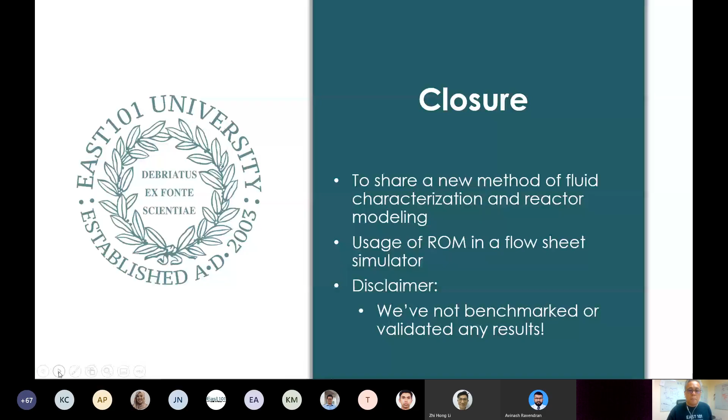Okay, so that's all I have for now, and I'd like to thank you all for your patience.

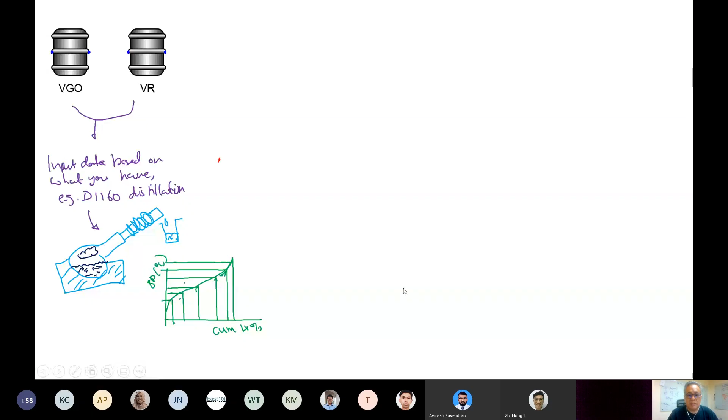Okay, so here's actually something that you can do if you've got a simulator on you. So what I've done is I've shown you the forward calculation - so from TBP curves, boiling point curves, I can do this decomposition. You can actually do this backwards as well.

Here's an interesting computational property which is in all flow sheet simulators: actually getting from your molecules - if you have all these molecules - back-calculating the TBP curve is quite easy, because all you're doing is essentially some simulated distillation, but you're doing it computationally. So you essentially have all of this material.

Okay, all of these components over here - imagine flashing this in HYSYS. So you can essentially simulate your TBP, D86 or D1160 analysis with this as your fluid, and you can regenerate these TBP curves. Here's an experiment you can do if you have any of these software tools.

So if you've got HYSYS, Unisim, around that family, you can actually punch in library components - C1, C2, C3, C4, C5, C6, C7, C8, C9, C10, C11. Input some library components into a stream, give it some compositions, and then you can go into utility and say generate TBP curve. So that computation is essentially running a simulated TBP distillation within the stream flash itself. That's how they typically do it, and that's tech that they have even in the more classic software tools.

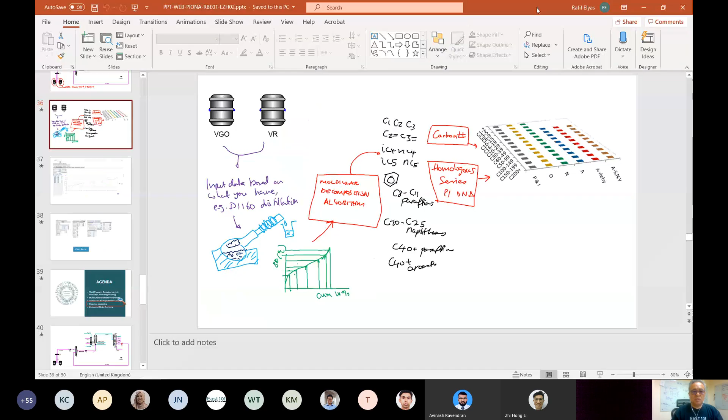Yeah. All right, thank you, Rafil. So far, I don't see any other questions.

If anyone has any questions that they would like to ask regarding molecular PIONA-based feed characterization or anything related to refinery reactor modeling, please type something up in the chat and we'll answer it to the best of our ability.

Okay, so Dimas put some comment - talking about the reactor model input to output. The model you show is kind of like a neural net.

Yes, so it is like a neural net learning. But if you take a look at neural nets, I guess maybe I'm old-fashioned, I still call it statistical models. So for me, when I think of AI, I think of neural net being a subset of AI. So you'll have the neural net happening, but the AI might do things like triggering the learning or managing the learning and managing the output. So to me, that whole thing is AI.

Yeah, so it is actually a neural net learning process. Yeah, yeah, that is correct, Dimas.